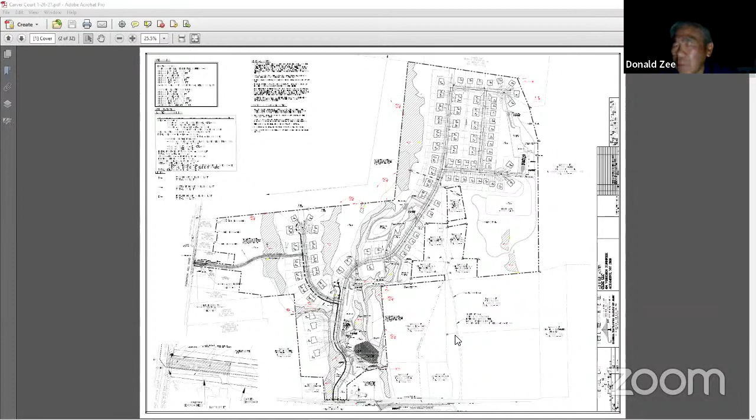All right, thank you. I'm good.

All right, Adam, before we get into the public hearing, can you just explain where we are in the process as far as the preliminary plat and what would follow here? Yeah, thank you, Matt.

As I believe was mentioned by the developer, there was a conditioned negative declaration issued, approved by this board at the last meeting on the 26th. That was the most recent procedural step required in order to have a valid public hearing tonight. We did have a public hearing previously, but we needed to close SEQR in accordance with New York State law for that public hearing to be valid. So that's why we're back here tonight for a second public hearing on this.

The only other action, aside from SEQR lead agency coordination and some of that, is that the planning board - I believe it was about a year ago - did approve the cluster plan sketch plan conditionally for the project. What that did was essentially allow the developer to access the incentive zoning and use the cluster provisions of the town and state law to adjust the lot lines, lot area, and bulk standards. That was predicated on a conventional subdivision that could be approved for this site, showing 110 lots. That's where the 110 lot density came from.

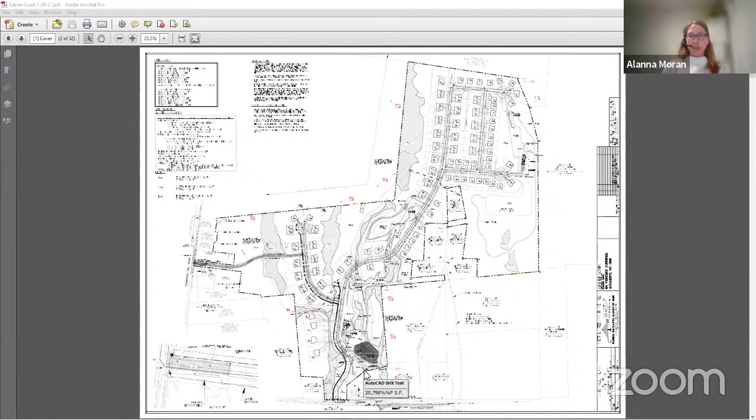Right, Kurt, which is why we have 65% traveling to and from the west, which is the majority of the site-related traffic. Yeah, I would guess probably even higher than that, closer to 80, but okay, good. That was my questions.

Yeah, Kurt, I wonder if some of that accounts for people taking the Defreestville exit to get on 90. Right, true, yeah. Well, you wouldn't go that way, but you wouldn't go Mannix Road. Well, not necessarily, because that's a very windy road. It would seem easier to get on the I-90 right at Route 4. That's a much windier, turny road, that Mannix Road, and then to Best Road. Yeah, I was just thinking out loud.

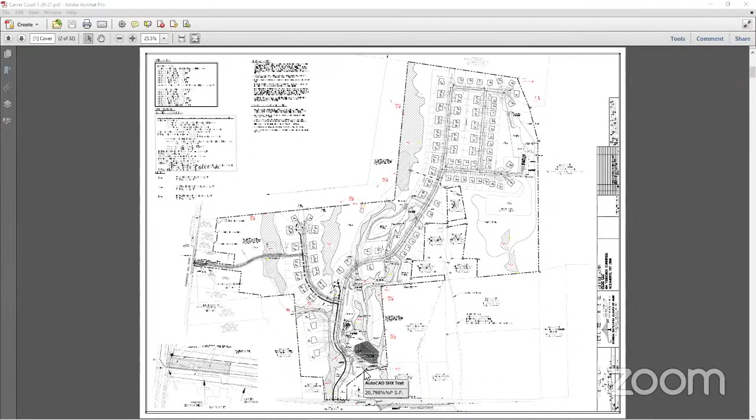Dwight, this is Adam Yagelski, if I may interrupt you. Yeah, sure. I want to note that we did actually receive, it's just not posted to the website, and that's an error on our part, a concurrence on the traffic study from Region 1, the regional traffic and safety permit engineer, Guy Tedesco. He sent that concurrence. So let me share the screen, Dwight, just so everybody can see this.

So what he sent was, he concurred with the methodology, estimates, distribution percentages. So we do have that, and we did coordinate with the SEQR review with DOT. So what we'll do, Dwight, is we'll make this a part of the record that's available online.

Yeah, that would have saved me a few hours. Thanks. Because I had to do that research myself because I noticed it was not there. So let's not do that again.

All right, a few other things. As far as no through traffic, both ends of the road would be appropriate sitings for no through traffic signage because they come from both ends. The engineer has stated that there seems to be no reason for anybody to use Thompson Hill, but I think what she's failing to take into consideration is human nature. A 30-second delay at that traffic circle on a Friday seems like forever. I've lived here 25 years. I know what I'm talking about.

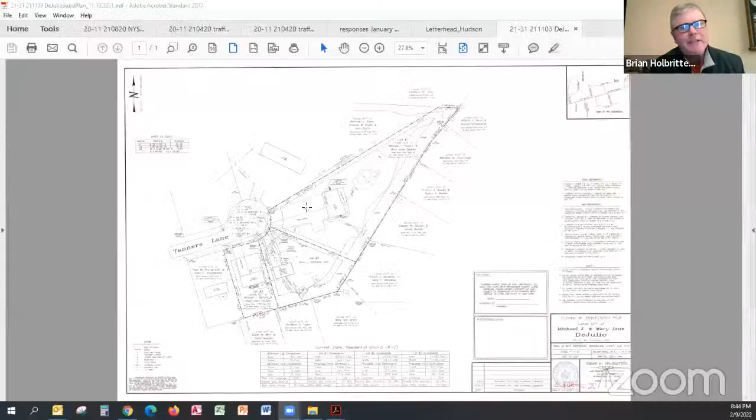I do not. Or was there an easement that was granted? I can't remember. So Chris, the driveway for the new lot comes out onto the cul-de-sac. There's no issues with that driveway whatsoever. The DeJulio's existing driveway for lot 1, with their existing house that sits off the end of the cul-de-sac, their driveway cuts over the corner of lot 2. We are proposing to grant an easement for that small piece of asphalt drive, probably only about 20 square feet total.

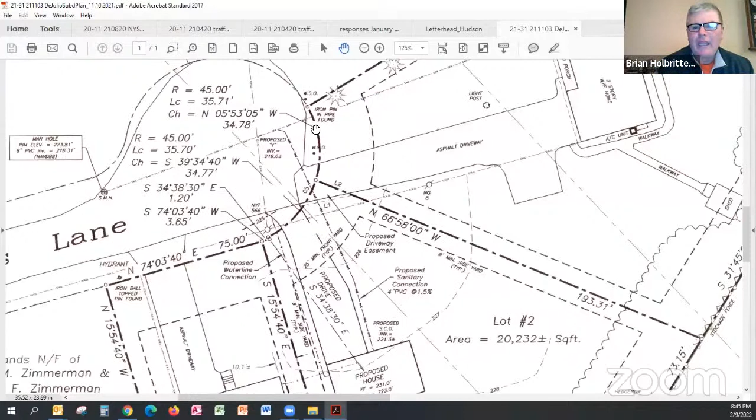Mr. DeJulio just put a brand new asphalt drive in, I think this summer or just last fall, and we would hate to slide it over, at least right now. At some point, that driveway could be shifted north a little bit so that it didn't cross lot 2, but at this time, we were hoping to just take care of that with an easement that ran with lot 2 for the existence of that little piece of asphalt.

Okay, yeah, that's what I thought I recalled the discussion. I just didn't know if that had been settled on or not. I'm a little unclear when the easement piece of it gets decided on in the process. And the new driveway for the new house, if you're looking down at the top of the house, is to the left of the parcel. Can you highlight that, the new driveway?

Yeah, so that's the right-hand line of it.

Chris, to answer your question procedurally, what we could do as a condition is have a requirement that prior to a Certificate of Occupancy, evidence of filing—the easement be provided to the town, like the actual filing receipt from the county clerk—and that they provide a copy of the draft easement language and filing materials for us, even before the board authorizes stamping of the plat.

Yeah, I think that would be fine if the board wished to go in that direction. Chris, anything else? Nope, I'm good, thanks. Noreen? No questions or comments.

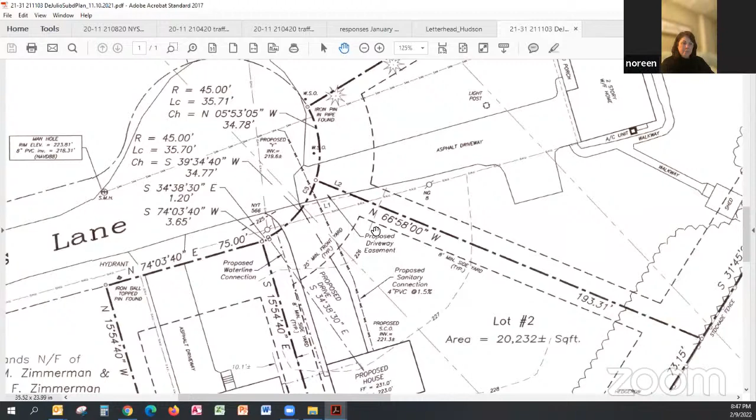Thanks. John? Yeah, I did the site visit two months ago today. When I did it, I walked the whole site, and I could see at that time that a house there would be right in the nature of the neighborhood. I knew another house because of the way it was going to be positioned. So it definitely, it's not a negative effect on that neighborhood right now. So I recommended that it would be put in place. I'm in agreement that they should be able to put a house in there, a third house. So that's my feeling.

Thank you. Kurt? No comments.

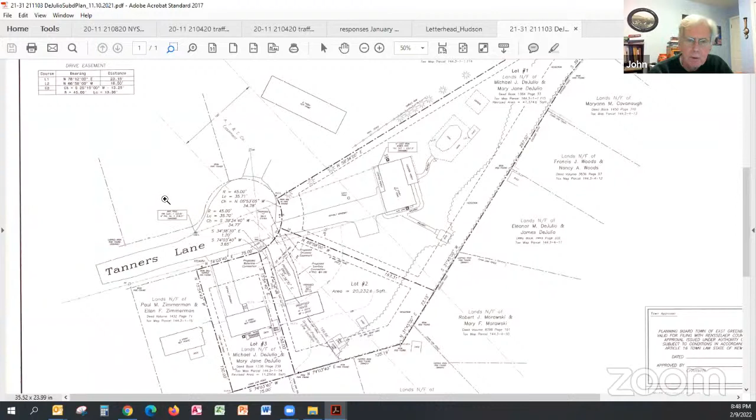Thank you. John Conway? There was some discussion last night at the zoning board about how far back the new house would be. Do you recall what that was? How far off the road the new house would be, what the setback would be?

So John, the new house—you can see on the drawing the 20-foot minimum setback line for this R2 district—and we are probably a little over 75 feet back from the right of way. So we've got the house set back in line with the rest of the lots, the houses coming in on Tanner's Lane, to provide plenty of room for driveway parking in front of the house, as well as get the house back on the lot where it has more width to it.

Yeah, and do you recall, just offhand—because I think this came up too—just how wide the lot is at that point where the house sits? I'm going to say that at that point the lot probably has a width of 90 to 95 feet.

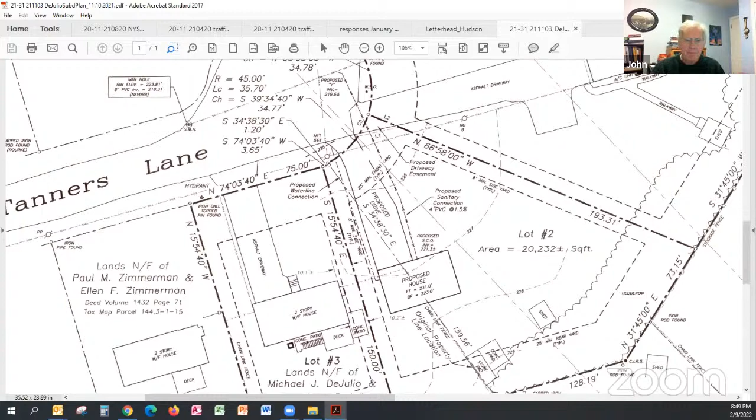Let's see. Dave Turpinning, do you have any comments?

Oh, he just sent me a text in the chat box. I'll read it. It says: regarding the DeJulio, 40 to 44 Tanner's Lane minor two-lot subdivision, as I stated at the zoning board as a public comment, the applicant has gone to much expense in an attempt to get variances. It is my understanding that they were approved at the 2/8/2020 zoning meeting with what he believes was a 3-2 vote. As a member of the public, I would encourage the planning board to approve this minor two-lot subdivision to go forward. The applicant has dotted all her i's and crossed all her t's and had a professional land surveyor, I would suspect at great expense. This additional new residential property lot will generate additional tax revenue for the town of East Greenbush. This is a good use of an individual residential property. It is not a mega development effort such as Town Center and Carver Court, taking up large portions of wooded property, adding additional load on the town's water and sewer infrastructure. That is it from him.

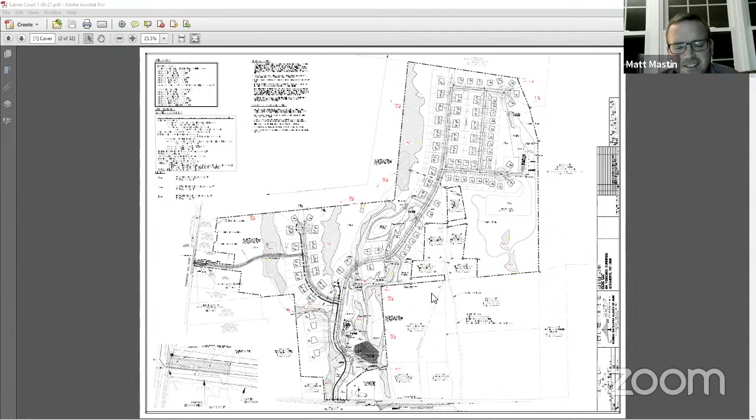That's good, all right. Well, we got one thing squared away. So Adam, what does this mean about voting on this? I don't know, we have 45 days to vote on it, but it sounds like the traffic is still an issue. How do we figure out traffic if we voted today?

I think one of the things, as it's written, the first 13 conditions and subconditions under number 13 - I can put this on the screen too - those are before the plat is filed. One of those is providing a sewer report approved by the town-designated engineer and DPW, for example. So one of the things we could do is have the developer come back in front of the board for final plat approval. Those 13 conditions are to get to final plat approval.

It's also the planning board's option to hold another public hearing prior to doing final plat approval. So the preliminary plat is a key milestone, but it's not the end. I think there's probably a way, before we do preliminary plat or final plat, to deal with the traffic. There's still going to be some conversations back and forth between the town, the developer's team, and the planning board. We could do presentations in the interim to keep the board up to speed.

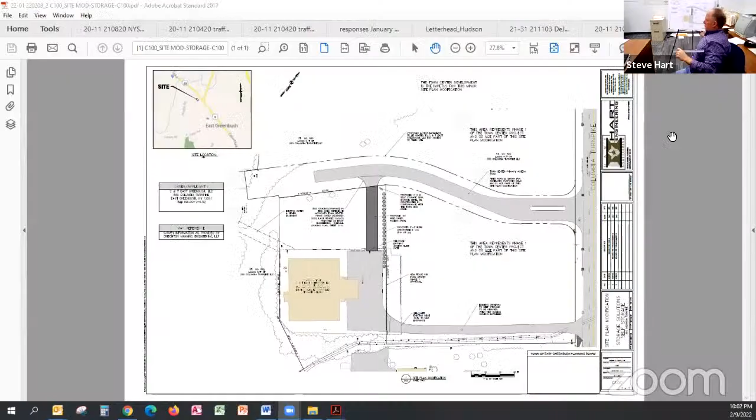We have been working with Adam and Allison and Tyler Culverson and Tom Tama, who is the applicant owner of 590 Columbia Turnpike, which is a self-storage place. So there are just a few notes that were added onto the plan since the last time. I think it was only 2 weeks ago that we were in front of the board. Let me just pull this closer... We got it up on the screen. Okay, so basically there were three changes that we made to the plan.

The one change was we added 20 arborvitae alongside -- it would be on the right side of that dark shaded gray road. We added 20 arborvitae in that area right there that Anna's pointing to.

We also amended the signage note a bit. We had it just called out as a proposed 4-foot by 8-foot sign for self-storage, but we added that whatever ends up getting built there needs to be in conformance with the town sign code. So we added that note as well for that small sign that would be put again to the top right side of the paved access road.

And then we added one further note that just said, where we're making that connection point to the road that will be built as part of Town Center Phase 1, calling out that the grading and drainage in that area will blend to the plans that were approved by Hart Engineering, which was on the grading plan sheet C110.

So in essence, those were the three modifications that we had made to this plan. Certainly if any board members or planning and zoning have questions on this, we're happy to further modify the plans. Adam, was there anything else to modify? I know we talked about a few things. Did Steve address them all?

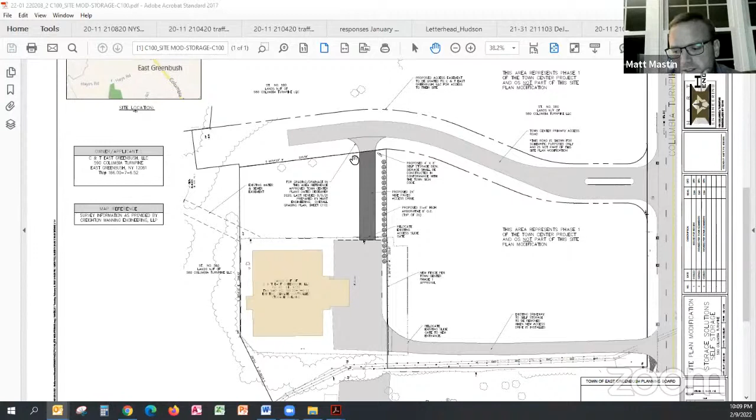Steve, I'm going to add a condition too that the site plan be modified to include the gravel area at the west side of the parcel. Correct. Okay, perfect. Whatever comments you guys come up with, we'll make those, honestly, we'll make them tomorrow or Friday and shoot that right back to you.

So let me just go through the board, if there's any comments or questions. Ms. Horn, comments, questions? Yep, good. Maureen, no, thank you. John, I'm okay. Kurt, no questions. John? I wonder if I could ask to have that sign clarified again, Steve.

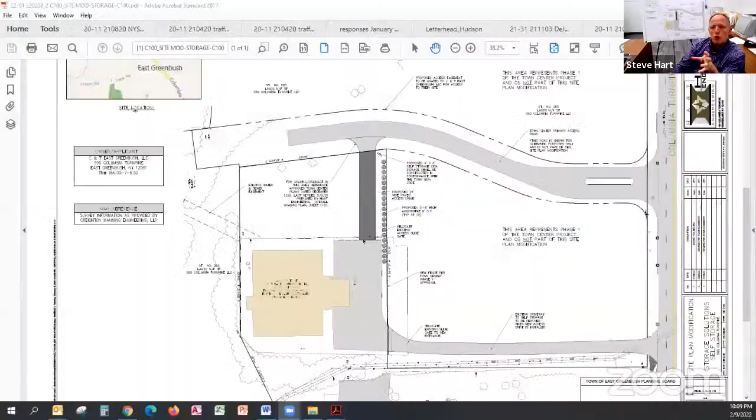What are you doing with the sign? So basically, John, it's a sign being put on the corner of that property. And also we added a note, because I think at the last meeting we had mentioned that we were taking the sign that exists out on 9 and 20 right now and moving it here. It's very important, however, that whatever gets installed there meets the town code.

And there were some discussions that the current sign that exists on 9 and 20 now doesn't meet town code. So in reality, we can't really just simply say, hey, we're gonna move it here, because we would be in violation of town code. So when the applicant comes in, whatever sign, we just need to make sure we meet town code with that.

So there'll be no sign on 9 and 20? The sign on 9 and 20 for the self-storage, John, that sign, so let me say this, the sign that's on the side is being dismantled, so that won't be there. And when I say the side, that is closest to Starbucks or closest to Hannaford Plaza. So that sign is going to disappear.

There is an agreement with self-storage that on the larger sign that Town Center builds out front, they have a certain allowance, I don't know if it's 32 square feet or 16 square feet. That's one of those monument signs that would list everybody, sort of? That is correct. And again, that's going to be done according to the PDD guidelines for signage. So that's correct.

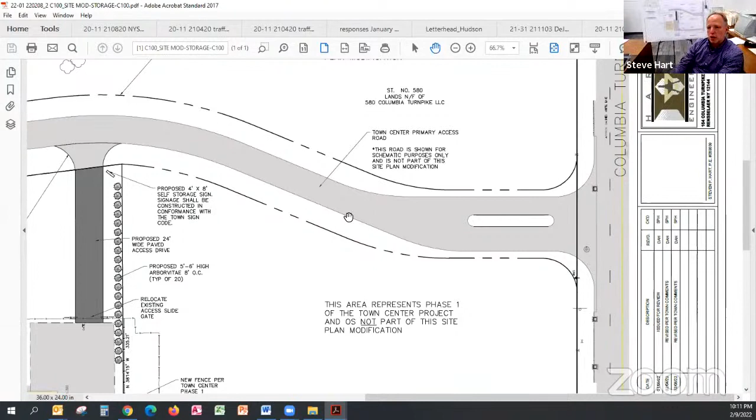So self-storage will have a call out there, but then as people pull in and travel across that new access road, they'll have a sign at their facility as well. And that's what that 4x8 sign is. And no sign on the building? On self-storage, no. I don't think there's anything that exists there today, so there's no new signs being proposed. Okay, thank you. Thank you.

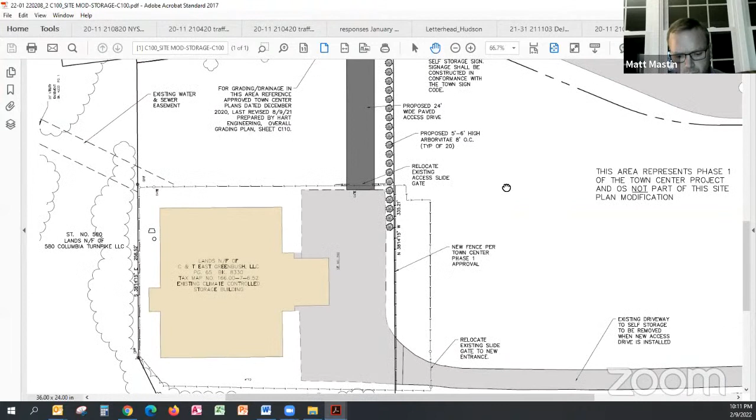You good, John? Good, thank you. Okay, with that, I'll make a motion for conditional approval. Adam, was this posted on the website? I think it should, yeah, it should have been.

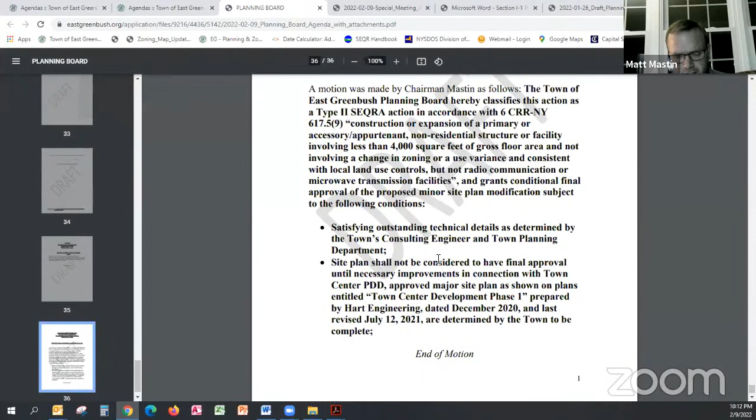I'll make a motion for conditional approval for C&T East Greenbush LLC, 590 Columbia Turnpike, with the addition of a condition that the site plan be modified to include the gravel area at the west side of the parcel. Do I have a second? Second by Mr. Conway. Roll call as follows: Chairman Mastin, yes. Mr. Bergman, yes. Ms. Horn, yes. Mr. Panton, yes. Mr. Conway, yes. Ms. Gill, yes. Motion carried by 6-0 vote.

Thanks for staying with us, Steve. Surprised you stayed. No worries. Thank you, guys. Take care.

Next, we have review and approval of meeting minutes. Not vote. Can anyone else not vote? No, just you. Any other comments or questions on the minutes?

All right, I'll make a motion to approve the January 26, 2022 minutes. Second by Ms. Horn. Roll call as follows: Chairman Mastin, abstain. Mr. Bergman, yes. Ms. Horn, yes. Mr. Panton, yes. Mr. Conway, yes. Ms. Gill, yes. Motion carried by 5-0-1 vote.